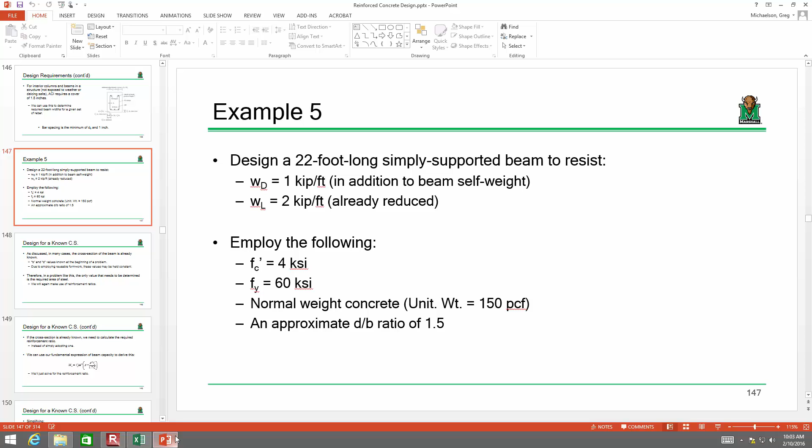For this problem, we needed to design a 22-foot long beam using 4 KSI concrete, 60 KSI steel. Here were our loads, a d/B ratio of 1.5, and from that we generated a design. Let me pull this up and zoom in here a little bit. Can you all read that? Is that good? Okay, so 4 KSI concrete, 60 KSI steel.

Our beam dimensions that we came up with, if I remember, were 14 inches wide and an effective depth of 21, which yielded a height of 24. And then we chose - was it 3 number 11s or 3 number 10s? 3 number 10s, and this was 3.79. Based on that, we were able to do these calculations.

Now what I've created here is an Excel sheet that, based on changing a given value, will recompute everything. The two things I want you to pay attention to are our loads, MU - that's how much the beam is experiencing - and this phi Mn, that's how much it can withstand before it will fail. There's a couple interesting things that can happen here. Let me back up. The reason I created this is I want to take a little time and look at the sensitivity of some of these parameters.

Like, for instance, let's take FC prime - remember, that's your compressive strength of your concrete mix. What if I double that? How does it really change the answer? You see what I mean? If I double the compressive strength of the concrete, do you think it's going to double this? You tell me, what do you think?

It'll go up, but will it go up significantly? Well, let's see. If I change that 4 to 8, that's all it does. Keep in mind, it changes your beta 1, and it ultimately changes all of your strains and your A values.

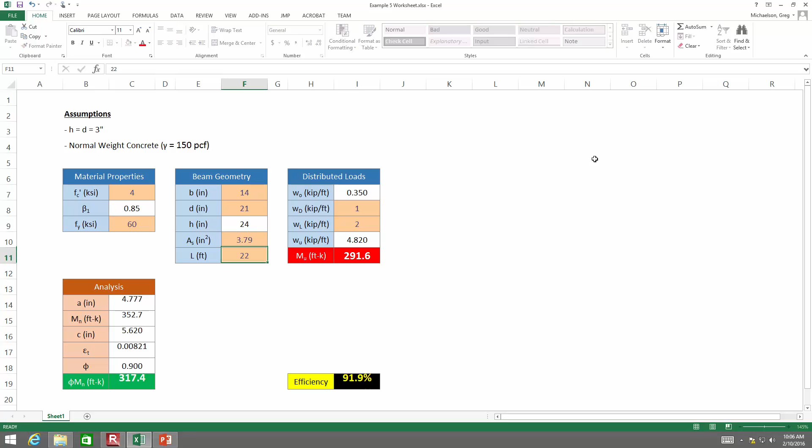All right, what if I take the area of steel and just increase it slightly? What if I do like 4.0? Okay, that starts to affect things a little more substantially. It was 3.79 — what if I double it? Okay, if I double the area of the steel without changing the beam dimensions at all, that really substantially changes the strength.

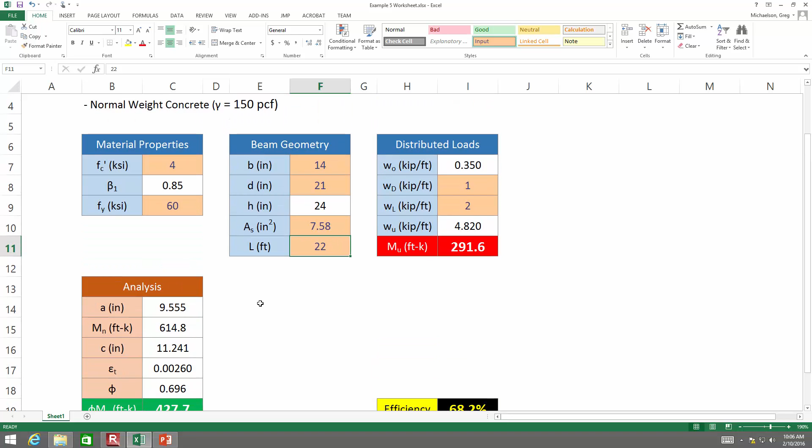See, that's what happens when you zoom in, you cut off some of the cells. If I double this steel area, this capacity went from like 300 to 400. It went up substantially, and all I did was place a few more bars in the beam.

Think about that, okay? Instead of doubling the strength of the concrete, all I did was place a few more bars, and the beam strength changed substantially. My point is that your bar selection has a significant impact on the strength of the beam, more so than things like the mix of the concrete.

That's just something I wanted to discuss right at the beginning so you all had a bigger picture aspect. Let me get back — this was like 3.79. A couple other parameters: if I change the beam width, like if I make that an extra 6 inches wide, that really doesn't change things very much.

So you can go around and make a sheet like this on your own. I'm not giving you one because I want you all to understand these calcs and do them on your own. But it's almost worthwhile to understand the sensitivity of some of these parameters.

Things like the concrete compressive strength — it matters, but not substantially. Things like the depth, because that's where you get bending strength, and the area of steel — those values actually have more impact than the strength of the concrete. Just something to bring up, food for thought for what's coming next, which is selecting reinforcement for a given cross-section. I thought it was a valuable discussion for what comes next.

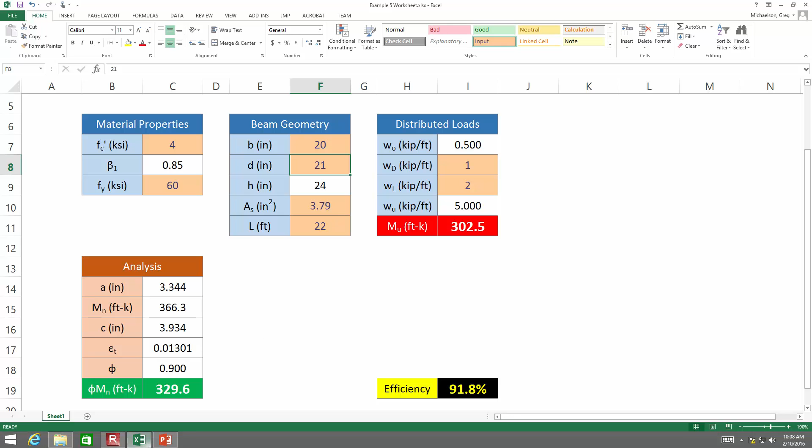So one thing I'll point out on your homework today: this beam you had to design was simply supported with a uniformly distributed load. One of the problems on your homework has simply supported beams, but with point loads and such. So you have to do some structural analysis — moment diagrams. I know you all know how to do that, at least those of you who had me.

No arrows, right? Tons of arrows. All right, inside jokes, all right.

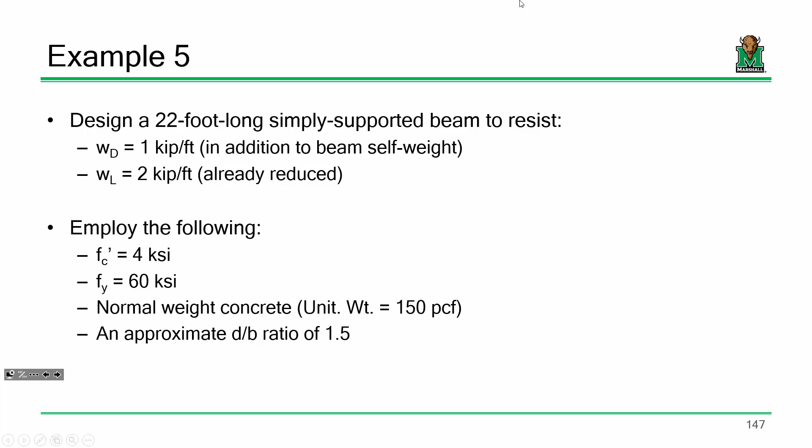Okay, so real quick, let me go back and review this, and we'll take our time with this discussion of known cross-sections. So the design problem I'm proposing now is, unlike example 5, where we had to start completely from scratch and didn't have a clue what the beam looked like, here we have a problem where we know what the beam cross-section looks like.

Anybody that's ever done any work with precasting or pre-stress knows that those beams are what they are. The sizes are pretty well defined. A lot of times if you rent concrete formwork, you're renting it in certain even increments.

The point is that it's not uncommon for a structural engineer to be given a beam size, and all they need to do is select the appropriate reinforcement that goes into that. A common pre-stressed concrete problem is, given a cross-section, figure out how many strands or bars need to go in that beam.

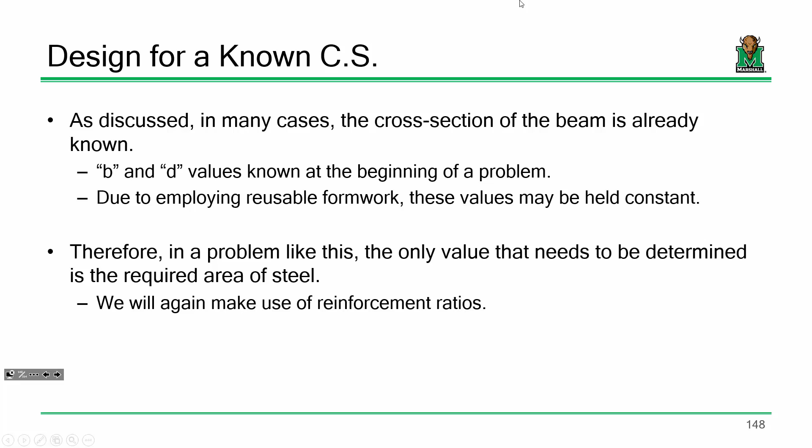So what we're going to do is focus on that. One thing I will say is, because we already know what the beam cross-section looks like, the design process is easier. It's much easier than what we did last time. I promise you that. Now, the big difference in how we approach a problem like this is rho.

Before, in example 5, we were using that 0.18 FC prime over Fy, because we had to make a starting guess. In that example 5, we didn't have a clue what that beam looked like, so we didn't know what the reinforcement was going to be or what it should be.

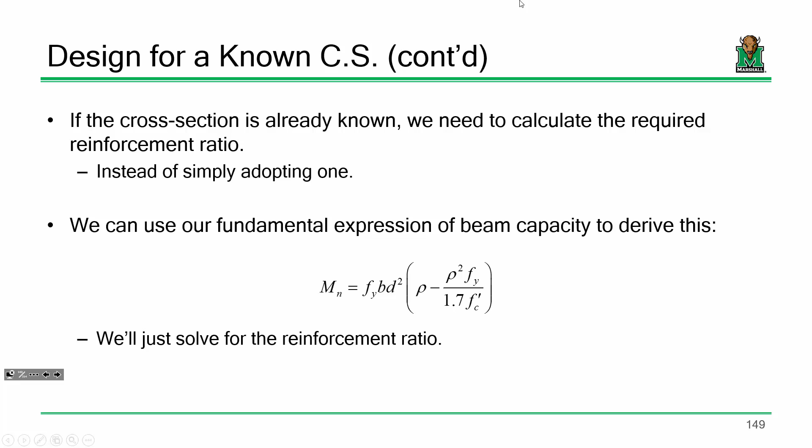We just needed a good value for design purposes. Here, however, if you're in beam design mode and you know what the beam looks like, you can define Mn as a function of your beam dimensions and your material quantities. The only thing you need is rho. So you look at that expression and go, well, I could just solve it and calculate rho accordingly.

So take this expression, do a little algebra, rewrite it a bit, and it's funny how that starts to look like a quadratic equation, right? Pretty simple. So take this quadratic equation and say, all right, negative b plus or minus the square root of b squared minus 4ac, all over 2a. Y'all remember that? I know you've used it. Come on, it better sound familiar.

Goodness, I believe you all are messing with me. All right, take this equation, solve, and you get two values for rho. It's a quadratic. Now, only one of those solutions is going to yield a value that we can use for the purposes of design. So going from here to here is just taking the quadratic equation and solving for rho. Everybody all right with that?

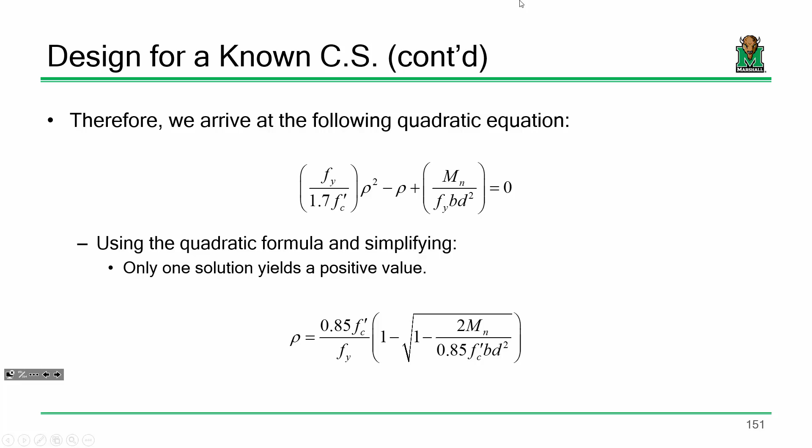All right, so here's your procedure for design. Number 1, we've got to compute our factored moments. We don't need to go through any design iterations because, unlike example 5 where we had to guess what the beam looked like, here we already know what the beam looks like. So there's no assumptions or iterations for MU. We just look at the beam and calculate its moment.

Now we still have to assume a phi value of 0.9 because we don't know what the strain in the steel is going to be, since we don't know what the steel is yet—we haven't picked it out. So assume a phi value of 0.9 and calculate an Mn required.

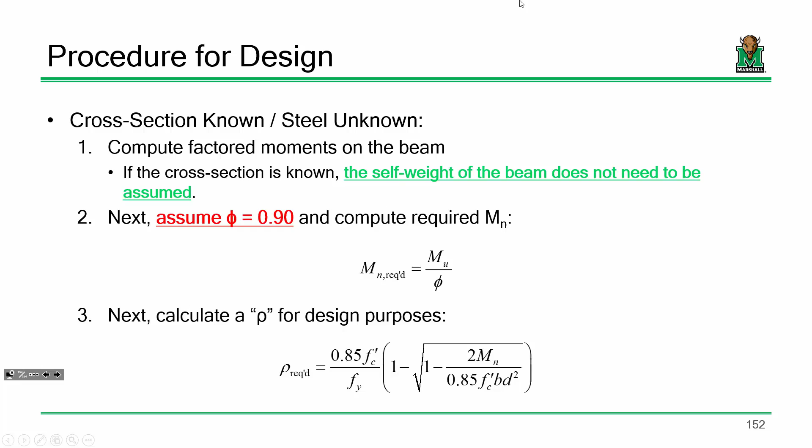Using that Mn required, we can calculate a rho for design purposes. Using that rho, AS equals rho times B times D will give us the required area of steel, and we go through the same process: pick a pattern of reinforcement, then analyze it to verify that assumption of phi, and make sure we have appropriate strain in our steel and meet ACI requirements on minimum reinforcement. And that's it. Promise you it's pretty simple.

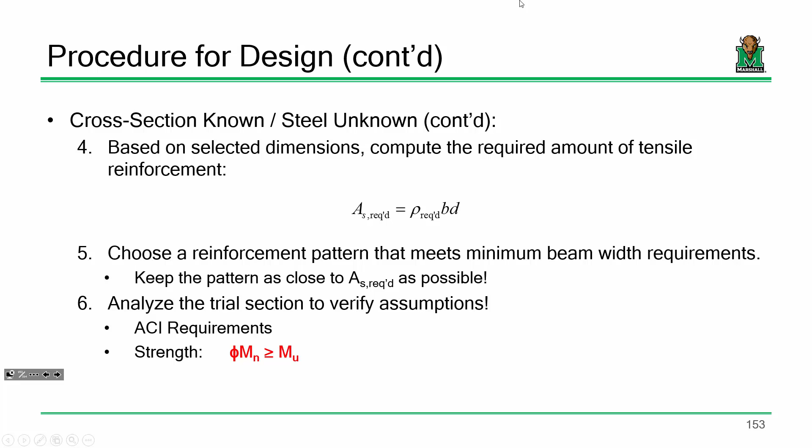Everybody good? Okay, so here's the beam that we're going to design. I made it a little easier on you because I just gave you the moment—160 foot kips. We've got the beam dimensions: the beam is 16 inches wide, 24 inches tall, and its effective depth is 21 inches. All we need to do is select the amount of steel that goes into this beam. Everybody good?

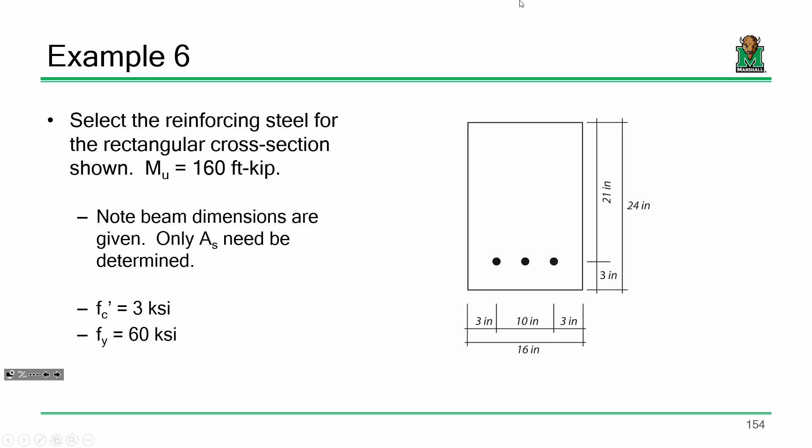Let me open up a little notebook. So I promise we're done with example 5. I'll never bring it up again. Well, I don't know about never bringing it up again, but we won't do any calculations with it.

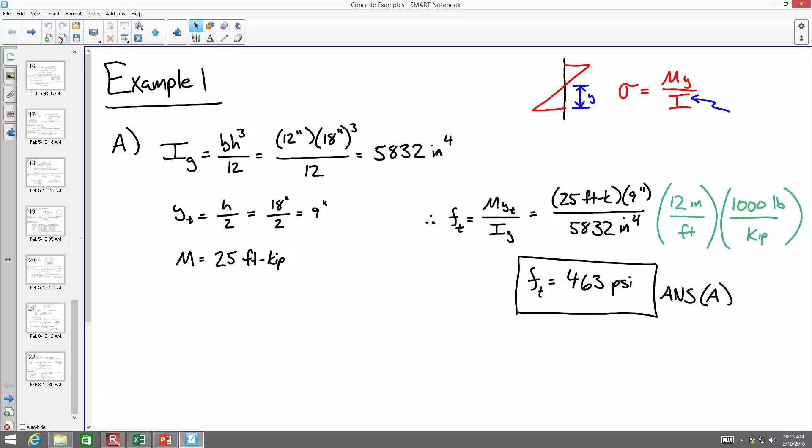Hold on. All right. Okay. Oh.

Okay, so let's start off with listing some of the parameters of the problem. I'll say material values.

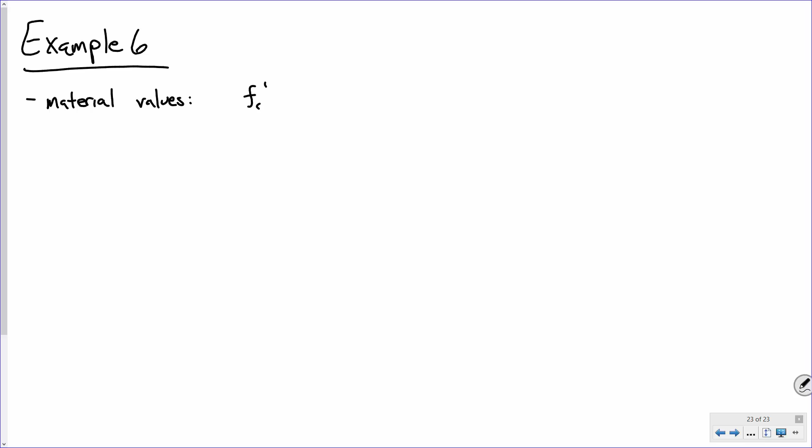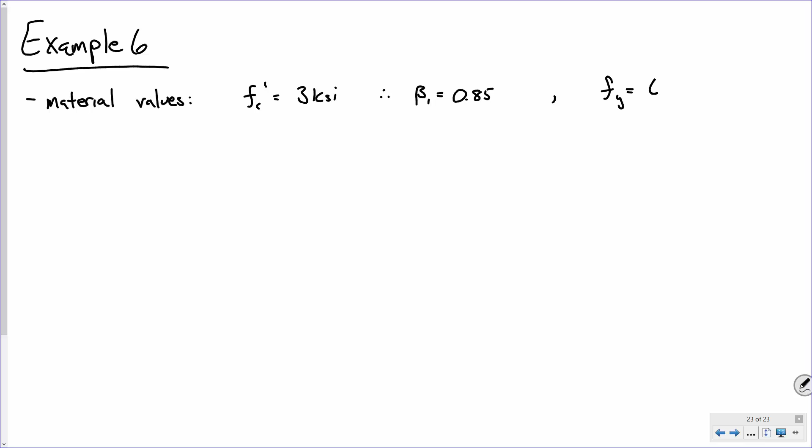What's FC prime and Fy? FC prime is 3 KSI. Just from that quantity right there, what other material-related value for the concrete can you tell me? We know FC prime, and that tells us about beta 1, which is 0.85. Exactly right, make sense? We also have Fy, which is 60 KSI. Again, make sure that you're consistent with that.

Let's also write some of the beam geometry. So B is what? And D is... do we need H? We'll go ahead and write it down, but will we need it? We won't need it. Why won't we need it? What would we use H for in this problem? We need H to calculate the beam's moment of inertia, or its self-weight. We don't need to worry about self-weight though, because we were given a moment. So we don't need it.

Now, what's the area of steel? We've got to find it. So the area of steel, we don't know. Okay, so I'm going to go through that step-by-step procedure so that you all understand how we're going through this.

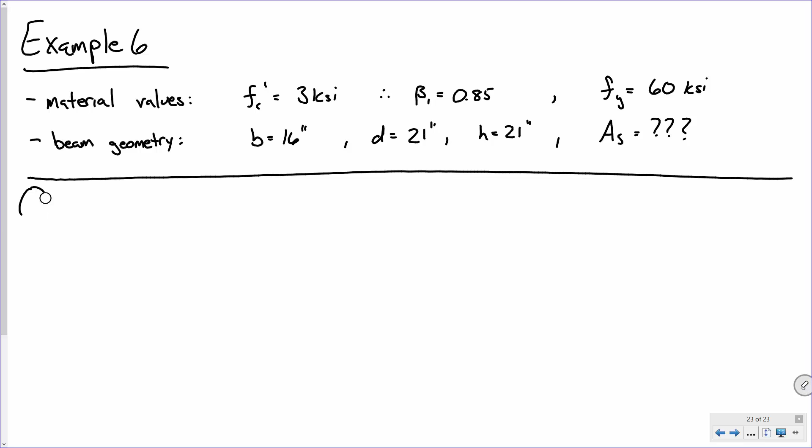So what's step one of that procedure? Compute the factored moments. So we'll say step one, compute MU. Now for this problem, MU is given, and I'm going to underline that. MU is given. So MU is what? Simple, right? Now, if it wasn't given, what would you need to do?

Do a little bit of structural analysis, right? You got to do the analysis to figure out what the moments are. Draw a shear diagram, draw a moment diagram. Fun stuff, isn't it? I can see you're having a hard time containing your excitement. If it's simply supported... we'll see. Put, you know, like 8 hinges in it and triangular loads, fixed couple moments. You know, make it indeterminate while I'm at it. Do a little bit of matrix analysis. There we go, do a little bit of finite elements on it.

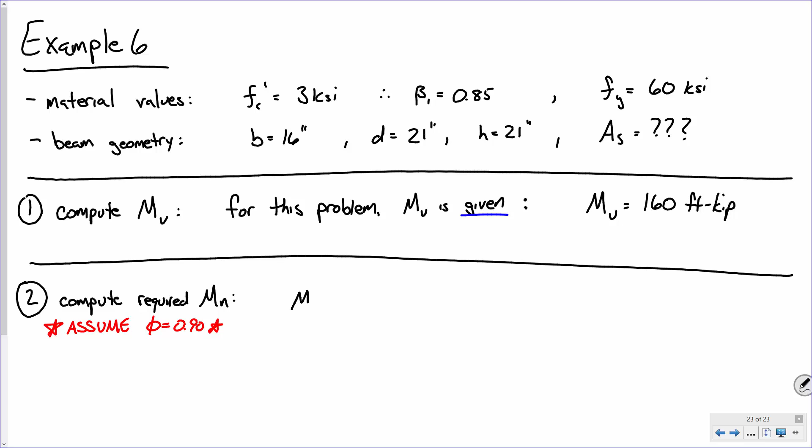So therefore, I can compute a nominal required moment of MU divided by phi, which is 160 foot-kips divided by 0.9. Now, in the interest of what's coming next, because I'm going to take this moment and use it with FC prime and Fy that are in KSI, I'm going to convert this into inch-kips by multiplying accordingly. So you plug and chug, you take 160 times 12 and then divide it by 0.9, you should get about 2133.3 inch-kips. Okay, how are we feeling?

So again, make sure we understand the process. Given this beam where we know the geometry, our goal is to determine how much reinforcement needs to go inside that beam. Now, we know what moment is being applied to the beam. We use that factored moment to determine our required nominal moment capacity. Keep in mind, this is not the strength of the beam, this is how much strength we need in the beam. We don't know what the strength of the beam is because we don't know how much steel is in the beam. Make sense?

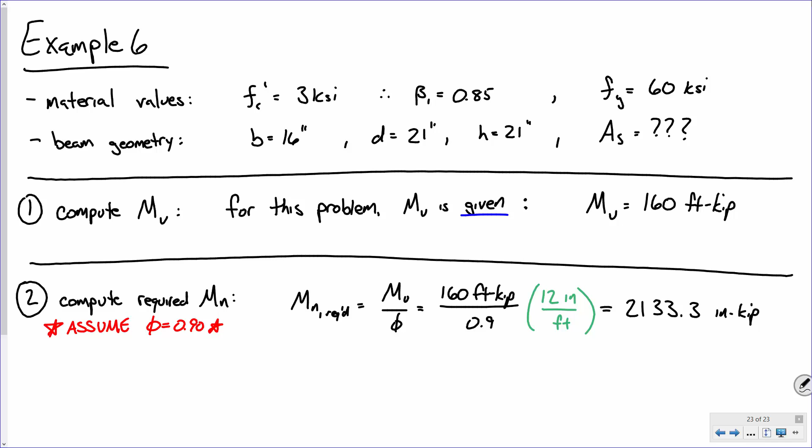So step 3, compute what? Required rho, our reinforcement ratio. Now, this one is a little more involved, so I might have to stretch this one out a little bit. So rho required is, let's see, 0.85 FC prime over Fy. This is a long one, I know.

So 1 minus, and then we have 1 minus a fraction. We're going to take the square root of all of this. So 0.85 FC prime, BD squared on the bottom, 2MN required on the top. We take the square root of all of that.

What do we think? So plug and chug: 0.85 times 3 KSI over 60 KSI,

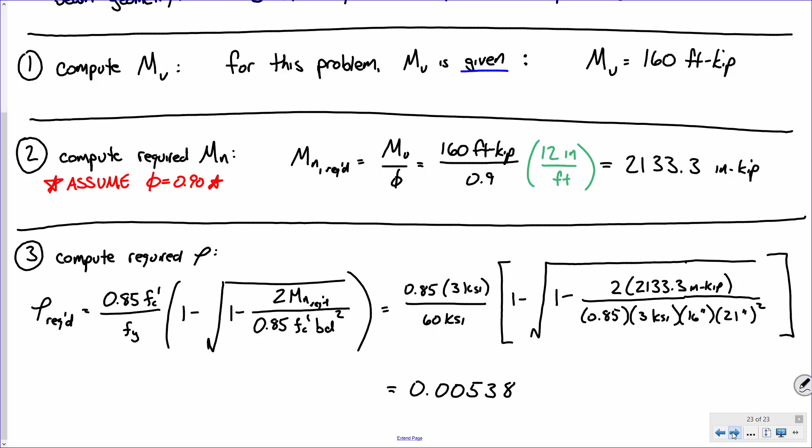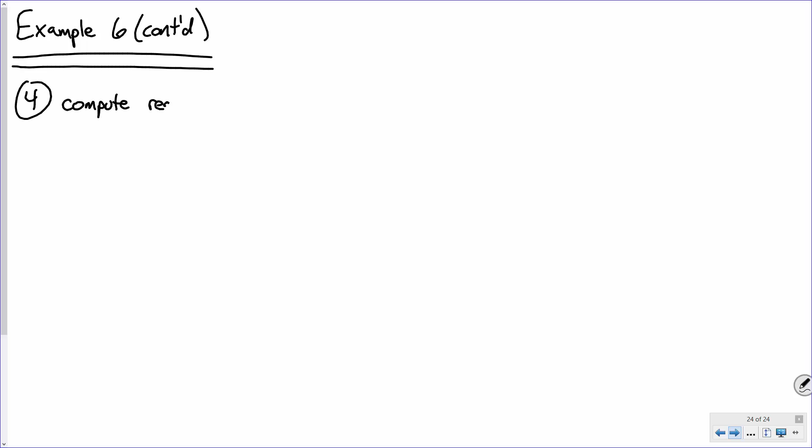All right, step 4. What are we doing for step 4? Compute required AS. So, AS required, how do we do that?

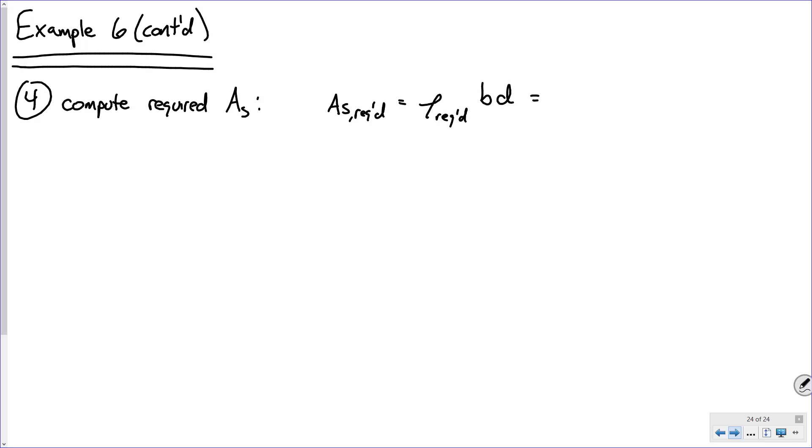Rho BD. So that's 0.00538, then times what, 16 and 21? All right, plug and chug, and that gives you—that one's a simple one—1.808 inches squared.

How are we doing? All right. What's step 5?

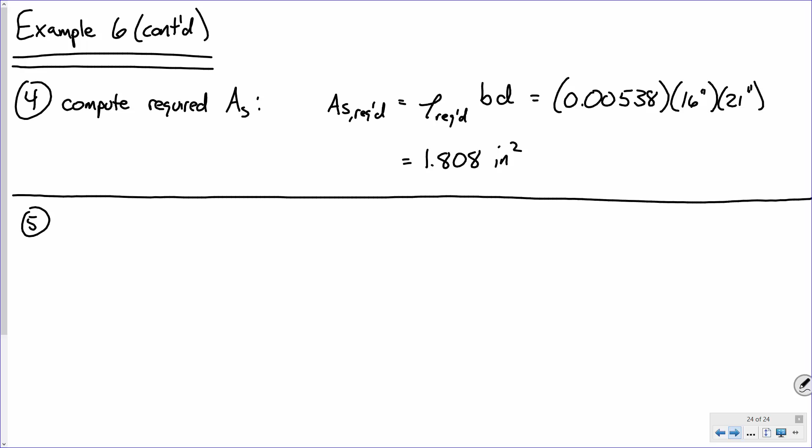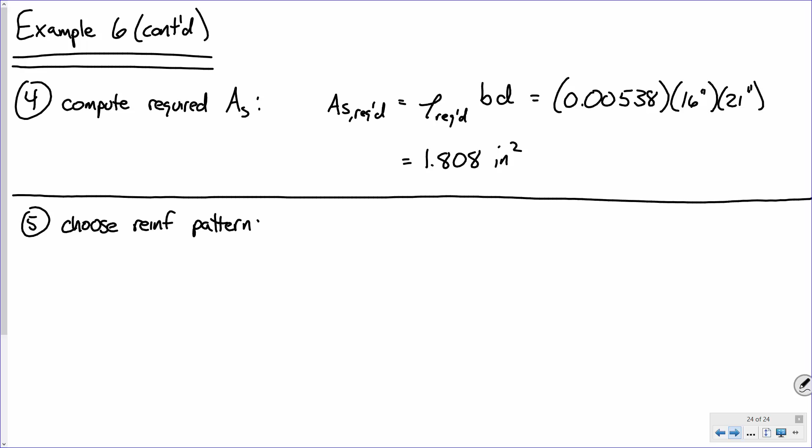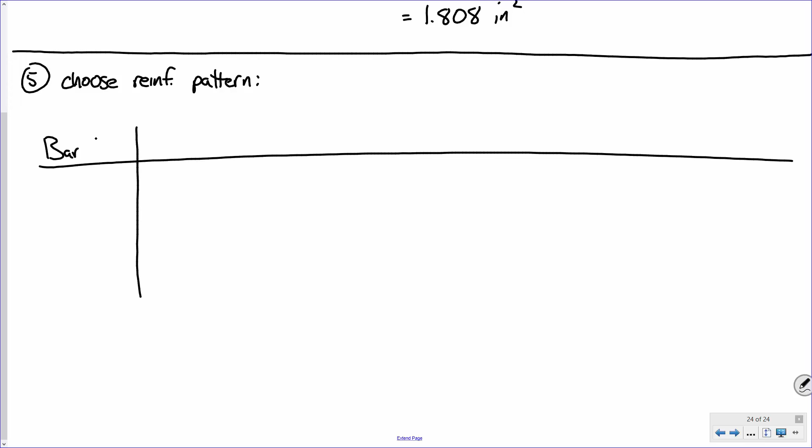That table's probably way longer than it needs to be. Bar size, number of bars, minimum beam width. Way bigger than it needs to be.

Okay, so this is where y'all use that beam design chart, right? Okay, so let's keep this straightforward, let's start off. Is there any viable number 3 options, really? Okay, what about number 4?

I know there's a lot of number 4s, but you want to go ahead and start with that just to have something to put on the board? Well, I am. So, yeah.

All right, how many number 4 bars must we place inside this beam in order to meet our steel requirement? 10. So you put 10 number 4 bars in this beam because the area of steel is what?

Okay, now your minimum beam width based on 10 number 4s is what? Remember, that's the table on the bottom. If you've got 10 number 4 bars,

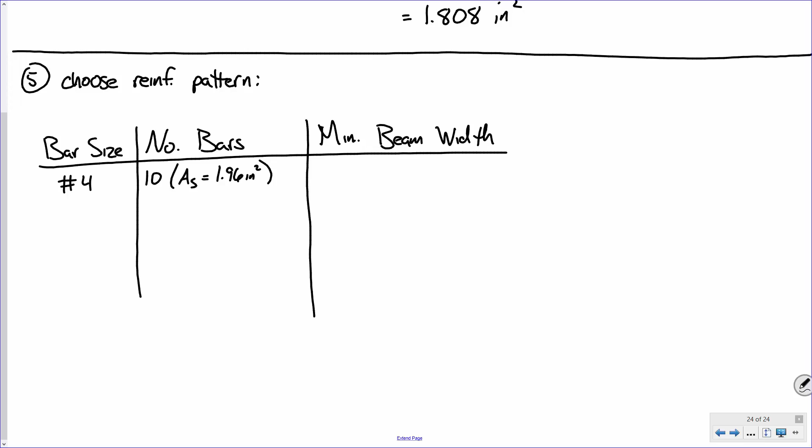Okay, so 15.8 inches for 8 bars, and then so plus 2 times 1.5 inches equals 18.8 inches.

See, okay, that might happen, so I wanted you to have that down there, okay? Everybody all right with that? Now, what is the beam width for this beam? What is B? 16. So that means that this option is

no good. Okay, now let's do number 5s. How many number 5s must we select?

All right. Okay. You picked that because there is a reinforcement pattern. This reinforcement pattern will yield an area of what? 1.86.

What's the minimum beam width? 13.4 inches. So that means that we are... all right, let's keep going.

What about number 6s? How many number 6s? Okay, and that is—what's that again? Minimum beam width? 11.8. I have 12.3. 12.3?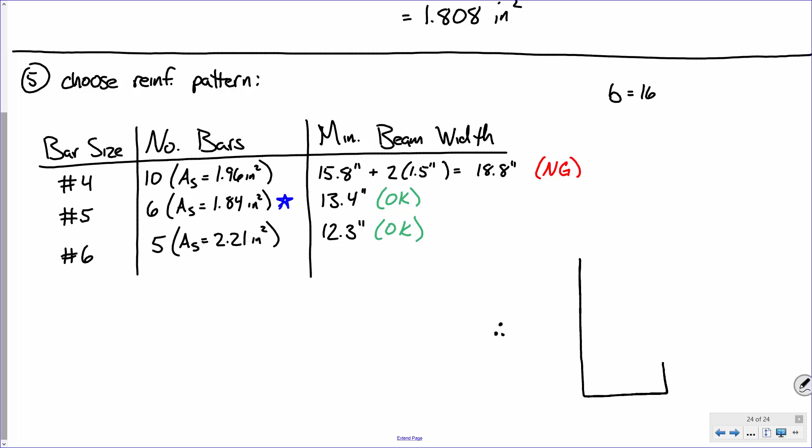All right, and then we're going to put 6 bars. 1, 2, 3... 6 bars. Number of bars, that's a good question. All right, number of bars: 6 bars that are number 5s. So maybe I'll write it out: 6 number 5 bars.

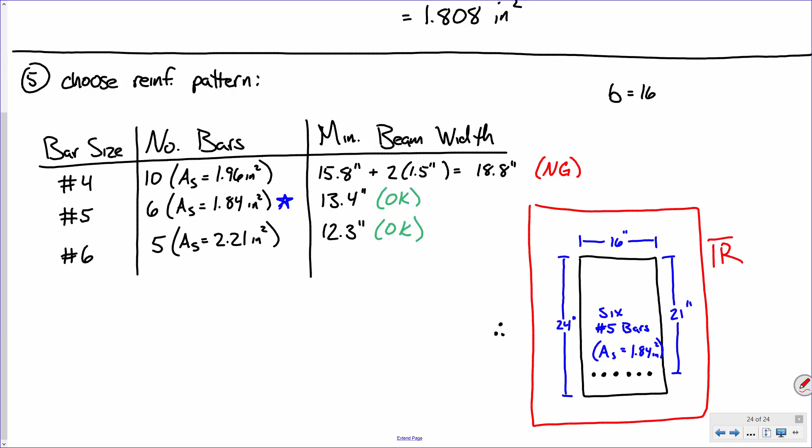Okay, why is it a trial design? What assumption do we need to verify? I assumed that phi was 0.9. How do I verify that assumption? I have to compute Mn pretty easily, AS times FY times d minus a over 2. I then have to calculate the neutral axis depth C, calculate the strain in the steel, and the strain in the steel will tell me what phi is, right?

So we assume this at the beginning, yes. We do a lot of work after that, yes. Our assumption is wrong. Assume we can do it all over again? That's a good question, no. What I would say is that you need to make some adjustments to your design. For a problem like this, there is only one value that we would adjust, and it would be what?

What's the only thing we're adjusting in this entire problem? The steel, the amount of steel. So if your beam is too weak, put more steel into it. So you would have to change the rho required, Mn required? No, don't go back and do all of that. Just choose the next increment of steel and analyze it accordingly.

Don't go back to step 1, because you're not going to change the formula, you see what I mean? If you're not going to change the formula, you're not going to change your rho required. I'll say this: there's less of a chance that you're going to do much iteration on a problem like this, as opposed to a problem like example 5, because with that problem you're just coming up with the beam dimensions and guessing almost.

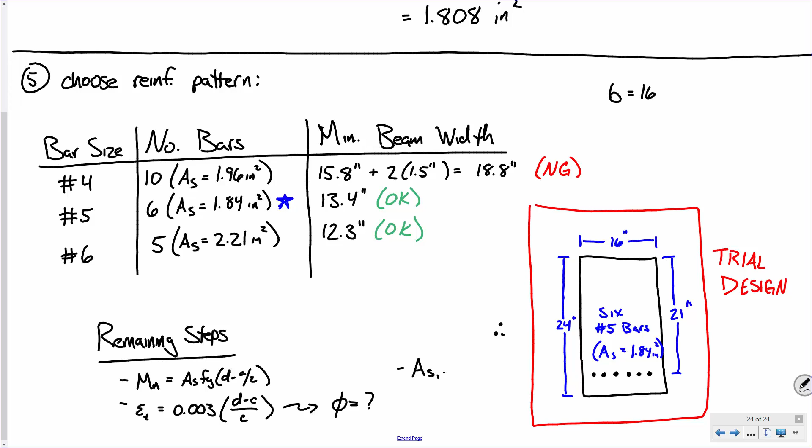We have to calculate Mn and the strain in the steel, to get what our phi value is, and you all can do that on your own. Also, I should put As minimum. Does the strain in the steel, is it greater than or equal to 0.004? You all should be able to do that on your own, though. Do you need me to do that? I mean, that's example 4.

The strain in the steel is D minus C over C. I couldn't see what that was. Well, I know, but that's in your slides, so.

If I was given this problem on homework, since it already has the bars punching out showing the 3, I would assume I'd have to regardless. So how do we know not to choose that? That's a good question, and I'd argue the diagram may be a little misleading. Usually what I do is draw a rectangle, and instead of those 3 bars, I just put a line and say pick the amount of steel that goes there. I understand that probably is a little misleading. Really, the intent of the problem is just to put the steel there and figure out how much needs to go there. That's a good question. You won't have to worry about that on exam day.

So for rebar spacing, would you just take the minimum cover distance and distribute each one for the row? Well, yeah, essentially, yes. Keep in mind that this minimum beam width calculation assumes 1.5 inch cover, number 3 stirrups, and that you're spacing the rebar as close together as humanly possible to meet that cover requirement. So my point is, if your beam's wider than that, you're right—just use 1.5 inch cover, number 3 stirrups, and space them evenly. You wouldn't lump them all over to one side.

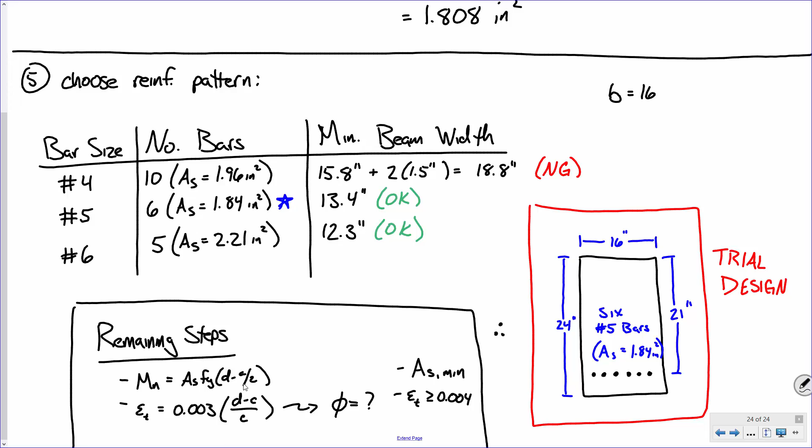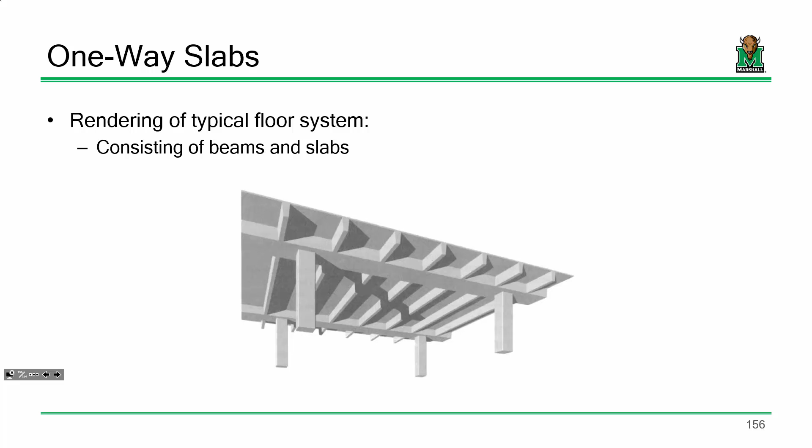I want to talk a little bit about one-way slab design, just so you all have the idea of what it is. Here's my point: a one-way slab design and a beam where the dimensions are known are actually really similar problems from a calculation standpoint. You'll see why here in a little bit. I'll give you these slides next time, but I think you'll see the known cross-section problem and a slab design problem are arguably the same thing. What I'm getting at is there's more to a floor system than just beams—there's also the slab, the floor system we're actually standing on. We're not standing on beams. I mean, this is a slab on grade, but if we're on the second floor, we're standing on a floor system comprised of beams and slabs. Make sense?

Now, I say one-way slabs—that might raise the first question: what do you mean by a one-way slab? A one-way slab is assumed to bend one way. So if I have a beam and a slab between it, I just assume that the slab bends like that—that's one-way slab design. Two-way slab design is if you assume the slab bends in both directions, this way and that way. There are advantages to doing that: you can significantly save on the cost of a floor system because your resulting slab can be thinner. Typically, two-way slabs are stronger, so they can be thinner.

Your reinforcement pattern can be a little more regularized because you end up getting a grid-like spacing and it comes out pretty nice. The problem is two-way slabs are pretty tough to analyze, at least when you're first learning it, so we'll start off just with one-way slabs.

There actually are some two-way slabs on campus. If you go to Drinko and look at those floor systems, they're actually two-way slabs. They're comprised of what's called a waffle system. Like if you've ever had waffles, you know how you've got this square grid with depressions? That square grid serves as the reinforcing ribs of the floor system. If you ever get the chance to see the actual floor system of the library, it looks like this big waffle grid of reinforced concrete beams, and that's because it's designed in that two-way fashion.

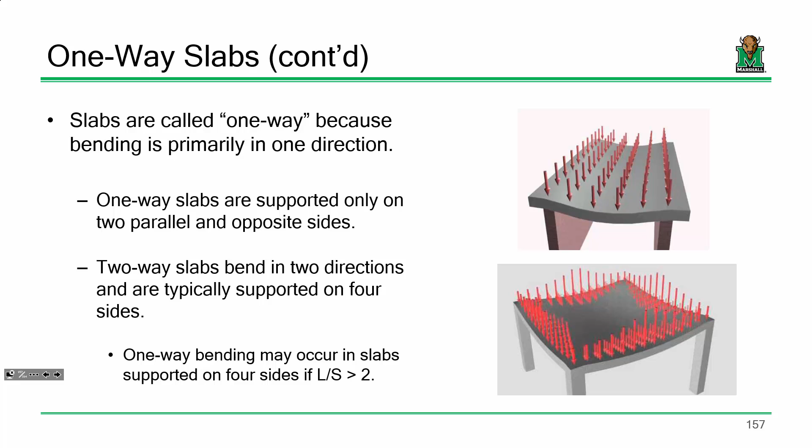Again, two-way slabs are a lot stronger, but they're a little more complicated. One-way slabs, however, are pretty straightforward.

The way we design a one-way slab is kind of like for those of you that have had geotech and looked at things like a retaining wall. Basically what you're doing is looking at a little slice of that retaining wall, and whatever's true for that slice is true across the board for the rest of the wall. It's pretty similar when you're looking at a slab.

What we do is cut out a fictitious 12-inch segment of that slab, and we assume that this is a rectangular beam. We pick out the reinforcement for this 12-inch slab, and then that's the reinforcement we use across the board. I have a design aid that I'm going to give you all next time.

Instead of a number of bar chart like what you all have now, where it's 4 number 8 bars for the area, it's basically a divided chart asking how many square inches per foot if we consider this bar spaced this far apart. It's more appropriate for slab design.

The one thing I'll point out is, in addition to main reinforcing steel in slabs, because slabs are so darn thin, we have to include a little bit of steel for what we call temperature steel. The idea is that over time, concrete properties can change. They can undergo shrinkage, they can expand and contract due to temperature. Because that concrete is so thin, it has more of a tendency to undergo cracking than a beefy concrete beam. So we throw a little bit of extra steel in the slab solely to prevent that type of cracking. The design of those is pretty straightforward.

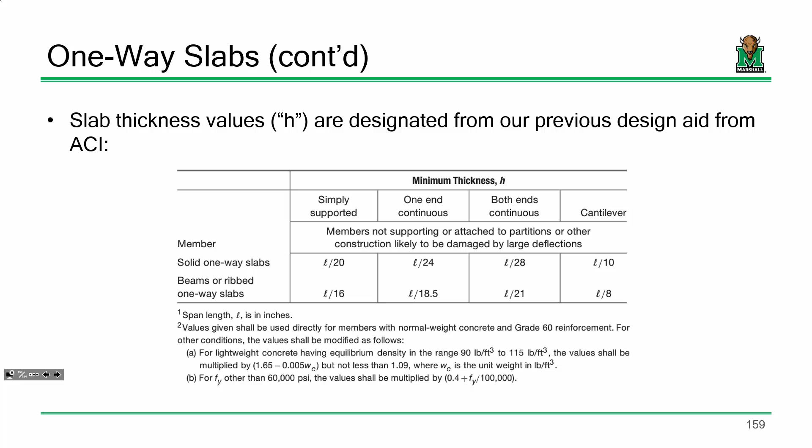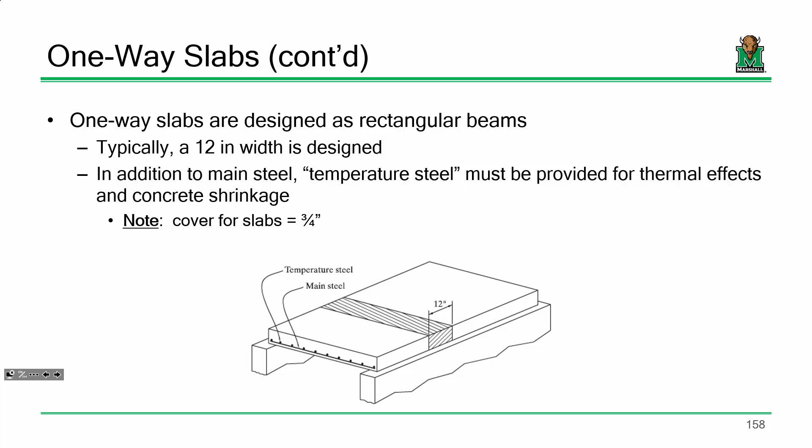So think about it like this: if you know the thickness of the slab and you know the width, assuming 12 inches, then you already know what the cross-section of the beam looks like, and all you have to do is select the steel. This is no different than the problem we just did. The only difference is you're selecting steel on a per foot basis, as opposed to just 3 number 8 bars in the whole beam, or what have you.

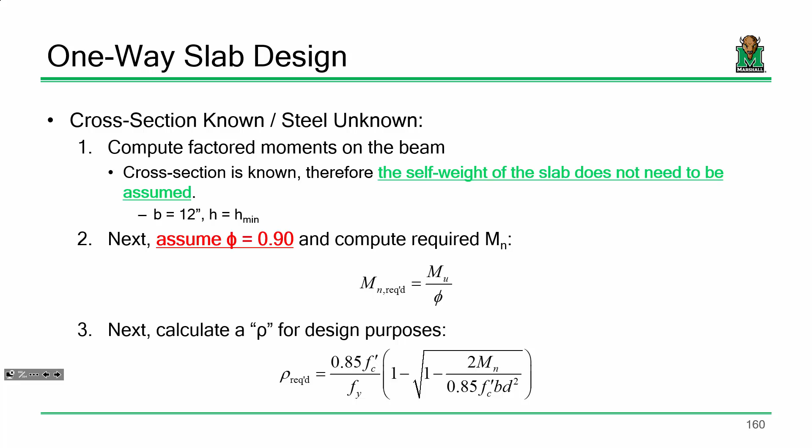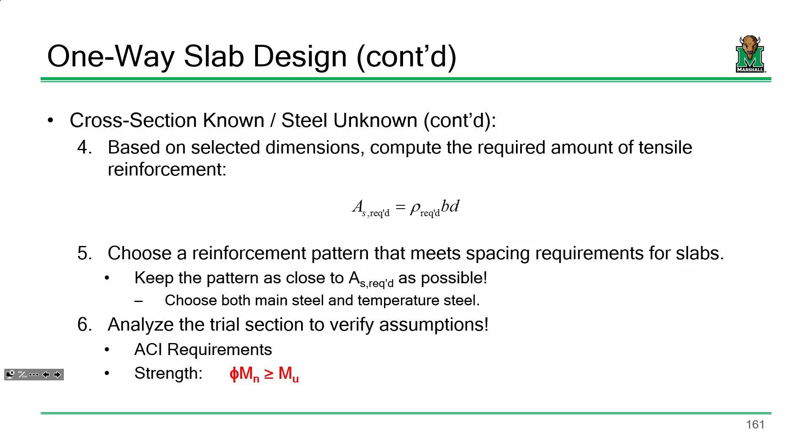So the process is exactly the same. We know what the cross-section looks like. The width of that beam is always going to be 12 inches. The height of that beam is just the minimum height that we take from that table. We calculate an Mn required, calculate a rho for design purposes since we know what the cross-section looks like. We choose a reinforcement pattern that meets spacing requirements, and we have to choose main steel and temperature steel and check accordingly.

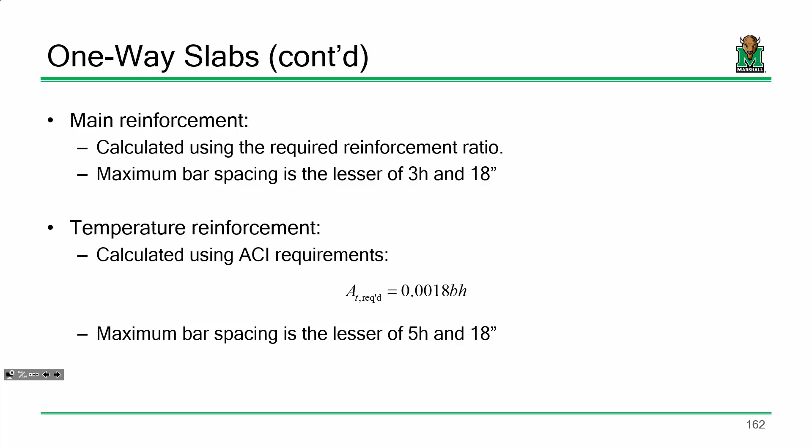There's also a couple things on limits for tension and temperature reinforcement. It's actually really simple, we'll get into that next time, and we're going to do a one-way slab next time. I do want to get into that because that is on your homework. After one-way slab design, that is everything on exam 1.